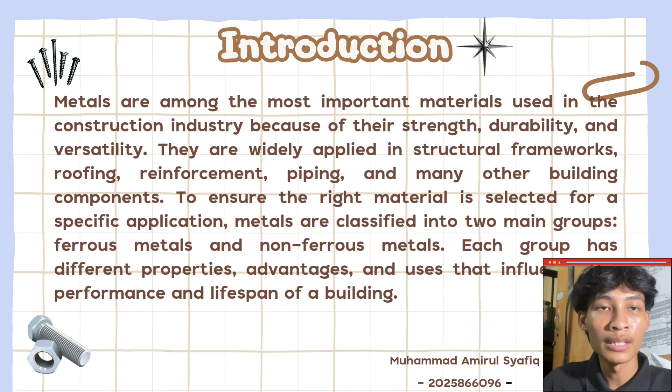To choose the right material for a specific application, metals are classified into two main groups, which are ferrous metals and non-ferrous metals. In this presentation, we will explain the difference between these two groups and their application in the construction industry. Before we begin, here are the learning objectives of our presentation.

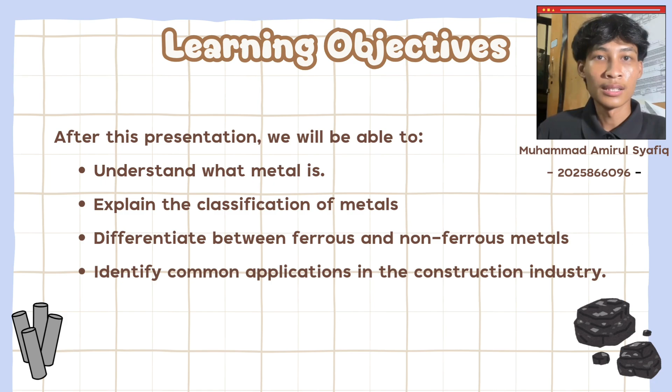By the end of this presentation, you will be able to understand what metal is, explain the classification of metals, differentiate between ferrous and non-ferrous metal, and identify common applications of metals in the construction industry. Now, let's start by understanding what metal is.

So, what is metal? A metal is a material that has several important characteristics. First, metals have high strength, which means they can support heavy loads without breaking. Second, they have good electrical and thermal conductivity, allowing electricity and heat to pass through easily.

They also have a high melting point, making them suitable for high temperature applications. In addition, metals have high density, meaning they are generally heavy and strong. Another important property is ductility, which means metals can be drawn into wires without breaking. Lastly, metals are malleable, so they can be hammered or rolled into different shapes without cracking. Because of these properties, metals are widely used in various construction projects.

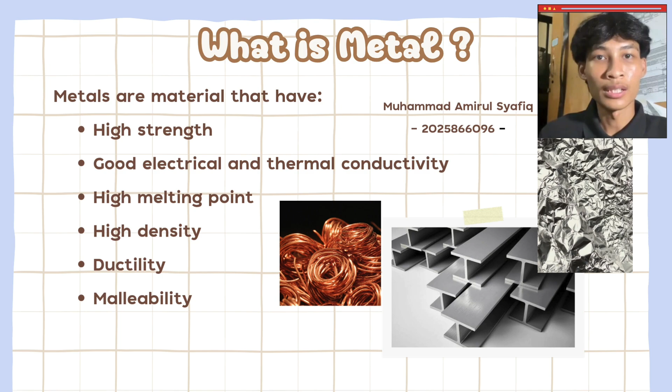They are known for their high strength, durability and magnetic properties, making them suitable for structural applications such as buildings, bridges and reinforcement bars. However, most ferrous metals are prone to rust when exposed to moisture, unless they are specially treated, such as stainless steel. On the other hand, non-ferrous metals do not contain iron. They are generally lighter in weight, more resistant to corrosion and non-magnetic.

This property makes them suitable for applications such as roofing, gutters, water pipes, electrical wiring and window frames. Understanding these two classifications helps engineers and builders choose the most suitable metal based on the strength, durability and environmental conditions required for a construction project.

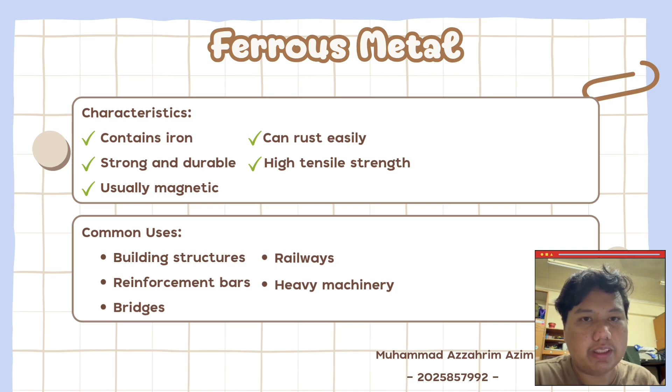Alright, ferrous metal characteristics: contains iron, strong and durable, usually magnetic, can rust easily, high tensile strength. And the common uses of ferrous metal are building structures, reinforcement bars, bridges, railways and heavy machinery. I'm going to talk about 5 types of ferrous metal and the application for each type.

So the first type is mild steel. The application is structural beams, bolts and reinforcement bars. The second one is carbon steel. The application is machine parts, railway and railway equipment. The third one is stainless steel and the application is kitchen equipment and handrails.

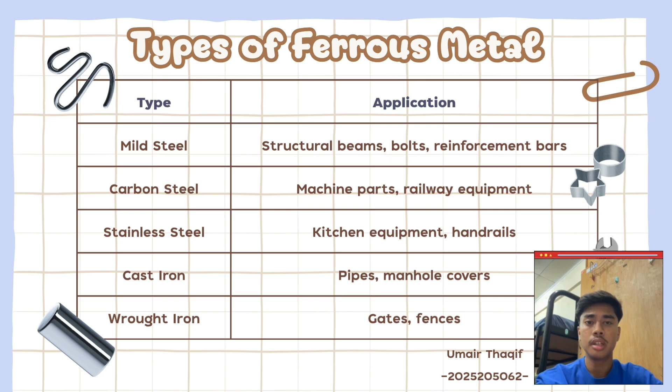Another one is cast iron. The application for cast iron is pipes and manhole covers. The last type is wrought iron. The application is gates and fences. So the next one, I'm going to talk about non-ferrous metal and its characteristics.

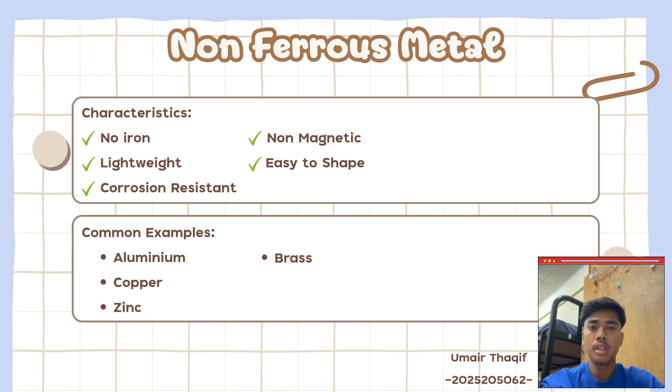It has no iron, is lightweight, corrosion resistant, non-magnetic, and the last one is easy to shape. So the common examples are aluminium, copper, zinc, and brass. Uses of non-ferrous metal. For the metal aluminium: the application of aluminium and alloys of aluminium, copper and manganese.

It's very lightweight and easily worked, used in aircraft manufacturing, window frames and some kitchenware. For the copper, copper is a naturally occurring substance. The fact that it conducts heat and electricity means that it is used for wiring, tubing and pipework.

For the brass, a combination of copper and zinc, usually in the proportions of 65% to 35% respectively, used for ornamental purposes and within electrical fittings.

For the metal silver, mainly a natural substance, mixing with copper creates sterling silver. It is used for decorative impact in jewelry and ornaments, and also to solder different metals together.

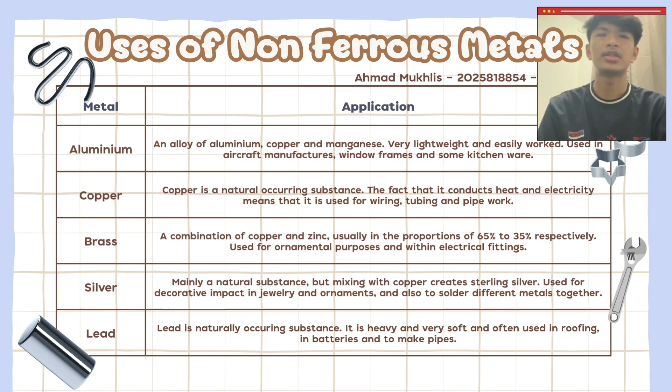For the lead, it is a naturally occurring substance. It's heavy and very soft and often used in roofing, in batteries and to make pipes. For the comparison, non-ferrous metal is non-iron, non-magnetic, lightweight, corrosion resistant, used for roofing, piping and electrical works.

For the ferrous metal, it contains iron, is magnetic, has high strength, rusts easily and is used for structural works.